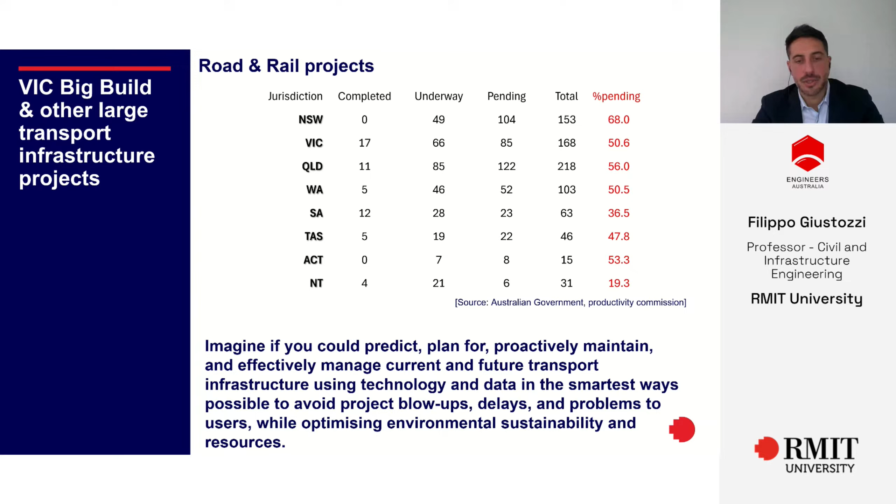So there is an opportunity to introduce technology that will allow us to do things better, to predict, to plan for, to use a proactive approach when doing maintenance on transport infrastructure. Let's not forget transport infrastructure projects might take a year or two or three to be built, depending on the size, but then they last for decades.

That's actually the important part. That's where most of the environmental impacts are generated from. Not many people know that probably just 10% of the environmental impact is generated during the construction phase, but in a transport infrastructure project, 80 to 90% of the total environmental impact is generated during the usage and maintenance phase, over the decades the infrastructure is supposed to last.

So if we can do things better for all those pending projects by using technologies, this will avoid project blow-ups. We've seen many different cases here in Victoria, for instance, delays and problems for users. So to do that, digital twin is one of the strategies.

Digital twin is nothing other than a virtual or digital representation of the physical assets. We can use this digital representation to facilitate the process of designing, planning, building, and maintaining, but also the end of life process of disposing of or recycling the infrastructure for a second life. So we can manage the entire life cycle of the transport infrastructure project using digital tools like digital twins.

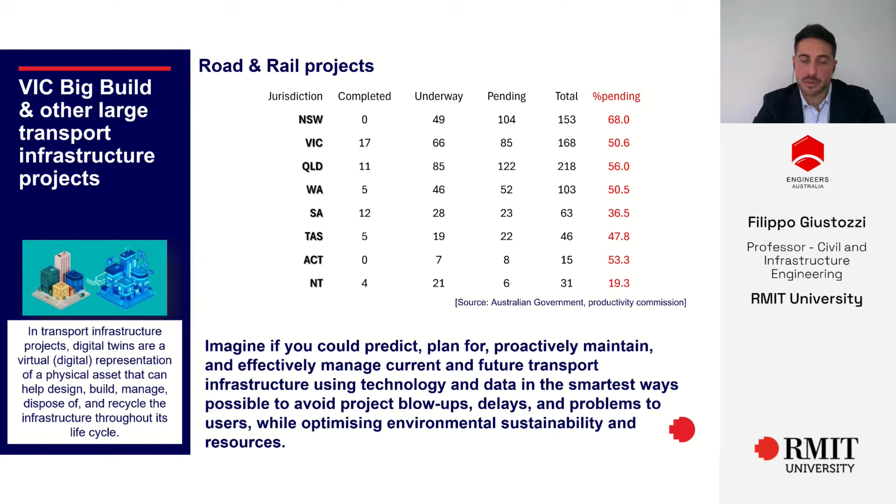Now, I said a few seconds ago that you can use digital twins throughout the entire life cycle of transport infrastructure projects. So if we look at a few examples, we definitely need to start from the planning phase. This is when we collect information about cost, the time it will take to build the infrastructure, the implementation, how difficult and feasible it's going to be, all the contract negotiations, and so on and so forth.

Digital twins can be used in this case to evaluate whether the project is technically and economically viable. And if it is, what the cost will be, the timing for implementing it, and how many stakeholders are involved. All of that relates to the planning phase.

I wanted to mention the example of the London South Dock Bridge, one of the few examples around the world where digital twins were actually used during the planning phase. They had a lot of significant challenges, and by the way, the bridge was supposed to be finalized this year, but there will probably be some delays as well, due to a lack of funding, that's my understanding at least.

So they had a lot of different technical challenges. One was designing the north abutment, because there was a need to house drive mechanisms. There was a hidden counterweight for opening up the bridge to let boats pass through it.

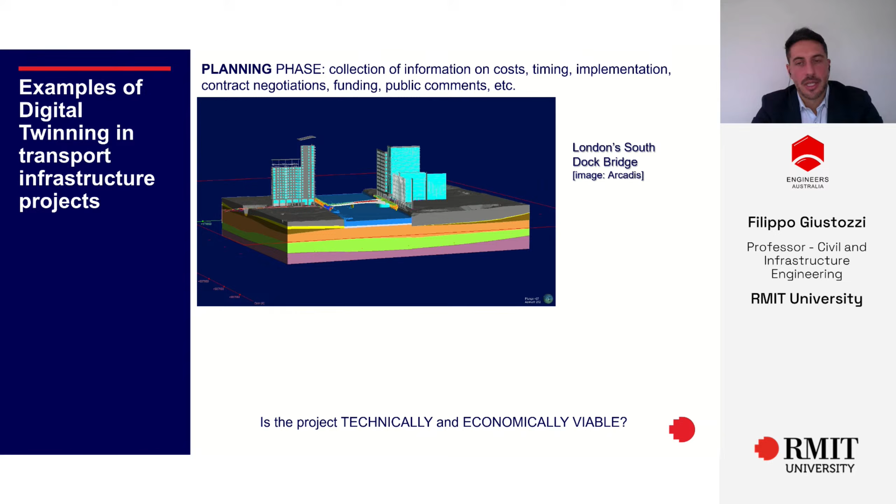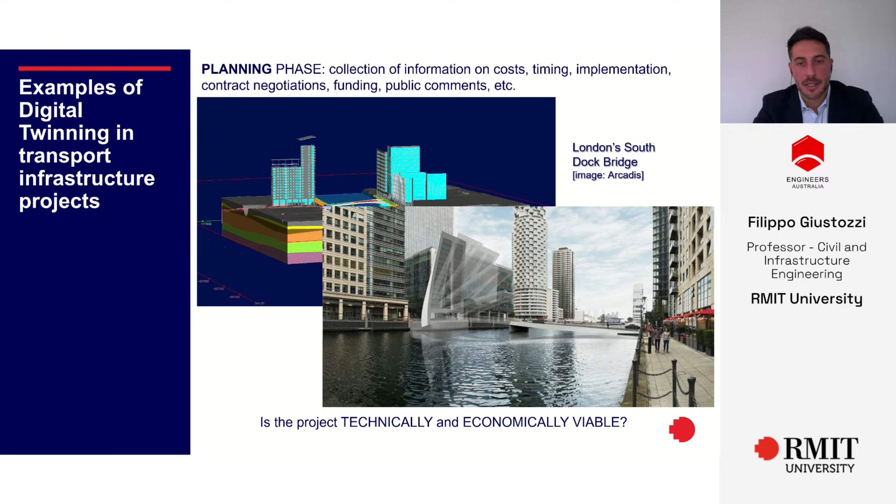In this case, Arcadis was the designer, and they were able to estimate the dredging volumes, for instance. They created geological cross-sections using digital twins. Overall, this integrated digital approach allowed them to save on ground investigation, estimated at about 30% of all ground investigation required, approximately £70,000 for this particular project. So doing it at the planning phase is a good way to start your project idea and verify how feasible it is from a technical and economic perspective.

Then we move on to the second phase, the design phase, continuing through the life cycle of the transport infrastructure project. At the design phase, we convert everything that was an idea into more technical specification details for the contractor to build the infrastructure, and later for the operator, if it's a road, a road operator, to maintain it.

This particular case should be familiar to a lot of people: the Port Rail Transformation Project that happened in Melbourne. The image is from Seymour Whyte, who was the contractor there.

The designer in this case was WSP.

This project, as the name says, was to transform or shift the majority of the goods and freights coming through those barges onto rail tracks rather than moving them on wheels. The big goal was to increase rail terminal capacity and improve the port's connection with the Victorian rail system.

This was done to reduce all the congestion related to trucks and moving goods on wheels in that particular area. WSP was given the task to design all of this. There were, as you can imagine, several stakeholders involved, and I think they were given around 6 months to design the whole project.

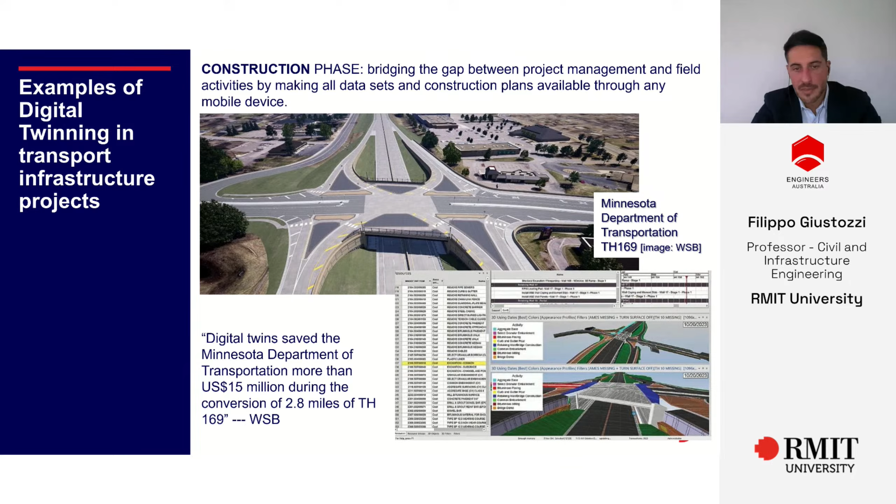Now, the fourth phase is use and maintenance. So if we keep going through the life cycle, now we've built the infrastructure, we need to operate it, we need to use it, we need to maintain it.

This includes all the monitoring activities, but also the maintenance for repairing the infrastructure. And that's also something a lot of people commonly forget. The infrastructure, if it's a transport infrastructure like a road or a railway, is going to be used by a lot of people every single day. So if we create a disruption in one particular point of the network, that is going to affect a lot of people.

So the usage phase, the fact that the users are using the infrastructure, that's also something that we need to manage and deal with effectively. Unfortunately, this use and maintenance phase is not really taken into consideration too much in terms of using digital twins for developing a model that will last and be effective during the usage and maintenance phase.

That's because most of the time we think a lot about the planning, we think a lot about how to design the infrastructure, and then we do the best that we can to build it. But then at some point, because transport infrastructure lasts 20, 30, 40, 50 years, it's going to be somebody else looking after this infrastructure for that long stretch of time.

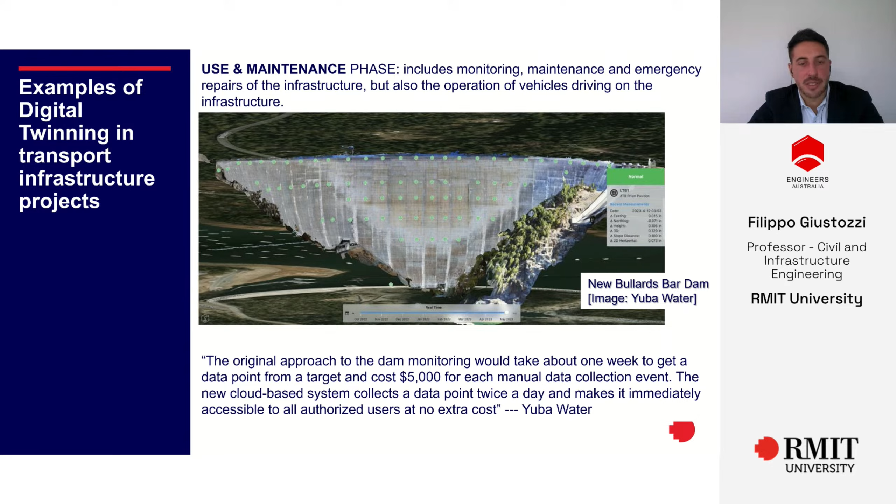There is a feeling that sensors are becoming smarter, cheaper, and smaller, and a few people are looking at putting small sensors into our daily drivers.

So at the factory stage, during the manufacturing of a car, there is a thought about using a small accelerometer, putting it into the car, and using some vehicle-to-infrastructure type of transmission system. For instance, the car passing through a portal in the middle of the highway, and the portal actually grabs all the information from that car in terms of vertical acceleration for the past kilometer.

This actually means that if you are the road operator of that particular road, you can collect the information from all the different cars passing through your portal, and this information will be helpful for you to identify if there are particular sections between portals

that require maintenance, because if you start finding a lot of vertical accelerations or higher than usual values of vertical acceleration, that means the roughness of the road is not as smooth as it's supposed to be, and there might be an issue in terms of potholes, for instance, or cars going up and down because there was a pothole there. You might need to prioritize maintenance in one particular section compared to another.

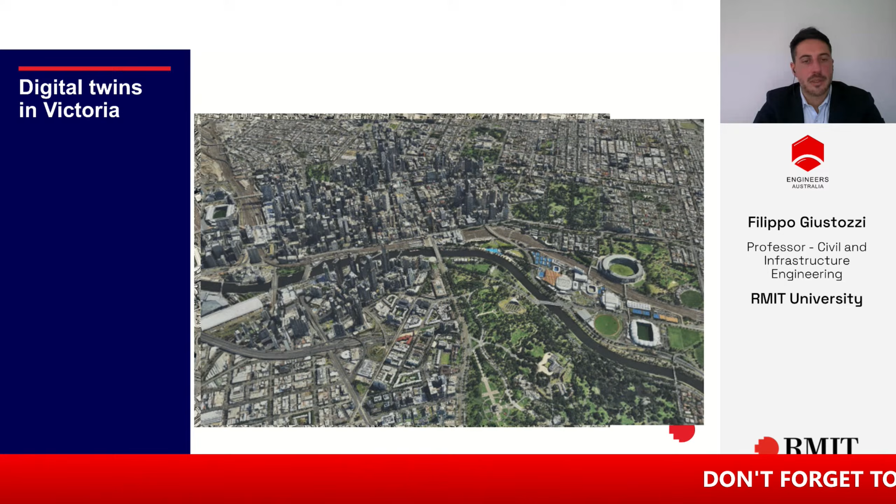The digital model can then be used to make predictions, for instance. So you can start overlapping a lot of different layers of information. In this particular case, for instance, we're looking at the precipitation change over the period between 2020 and 2039.

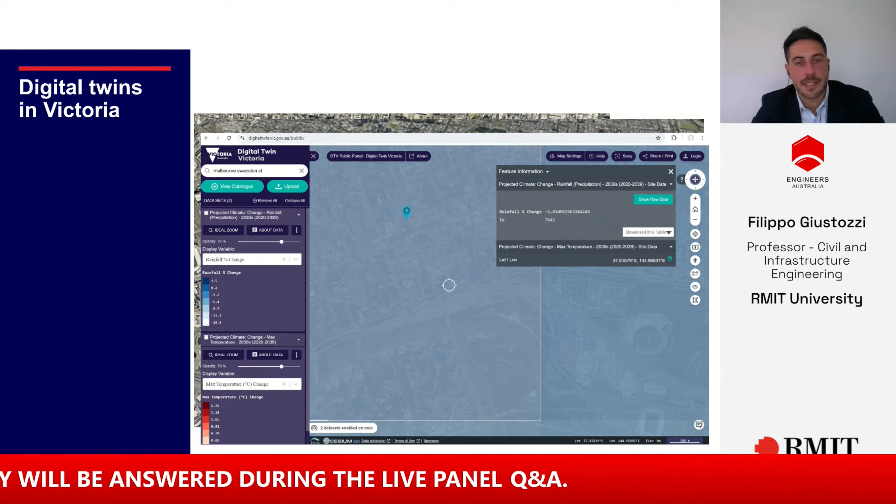2020 to 2039. And you can see that there are different colors because the prediction is that in this particular area of the CBD, there is going to be a decrease in percentage of rainfall change by less than 5%. In this area towards Richmond, the prediction is different.

So you can adjust based on the information here, starting by saying, okay, if I need to build new infrastructure here, new roads, I might need to consider flooding, flash flooding, rain intensity, and how that changes over the next few decades. You can do the same for temperature, for instance.

So there is another layer of information through the portal. You can see the web address there: digitaltwins.gov.au, digitaltwin.vic.gov.au.

And same for the temperature. Some areas of the CBD will be exposed to an increase in temperature of approximately 1 degree Celsius in that period of time. You can change the prediction time. They have all the way up to 2050, 2060 and onwards.

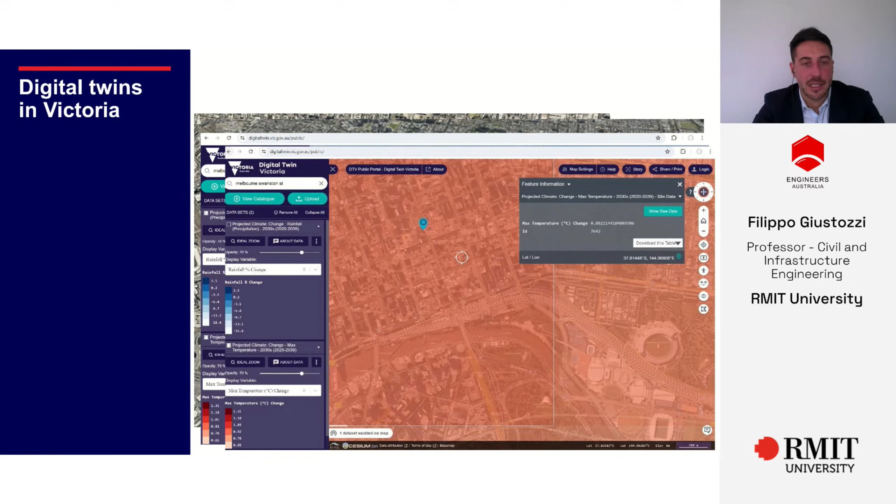That will also be helpful because, as you know, asphalt is black. Roads are made of asphalt, and the road will heat up if the temperature goes up. If the air temperature is about 40 during a hot summer day, the road temperature might be around 65 to 70 plus. That means all the buildings surrounding that road will be heated up indirectly by the road itself. So that might be something to consider when building new roads.

There are so many things that you can do. Unfortunately for roads, you can grab information from Digital Twins Victoria, but as you can see on the right-hand side, when you start looking for information, most of the data sets are empty. That's because we do not really collect much information for our roads. I can't find anything here that tells me what the defects on the roads are, what's the condition of the road at this stage, if it requires maintenance, what the sensors are telling me. Maybe there are no sensors in that particular road.

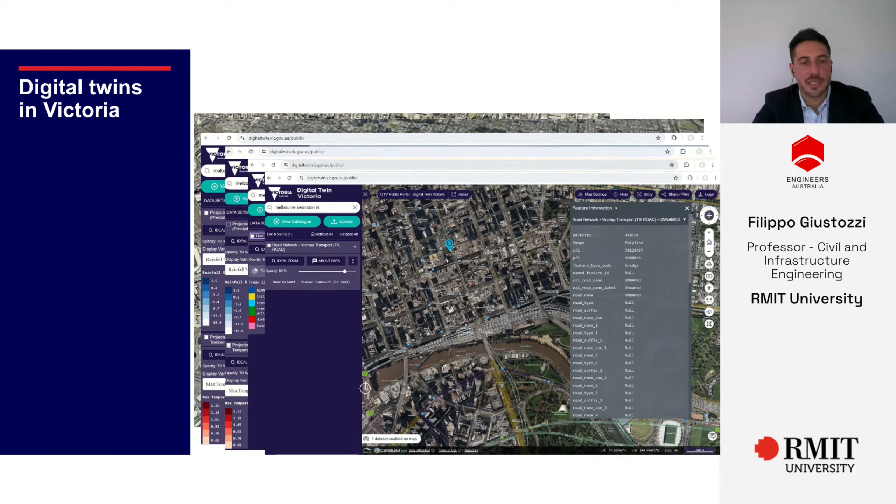So Digital Twins is like a huge digital brain that can help you manage all of these different layers of information.

I think, and I'm about to close with this slide and the next, that there is scope to use Digital Twins to produce what I call an autonomous infrastructure management system. Basically, the entire transport network, the roads, the rails, the airports, self-managing themselves from an infrastructure point of view. I'm not talking about traffic flows, I'm talking about infrastructure, the road, the rail track.

Using different algorithms like artificial intelligence and machine learning, we can enhance the capability of digital twins. The road can actually start looking at information in real time coming from the sensors and start alerting the crew: look, you need to go there at that particular time of the day, because that will minimize the chances of you creating a congested road between these two points.

Or if something happens to this road, I can let you know that if you close this road, this is going to affect this many people. If you're closing it at this particular time of year, this is going to affect this many people, so they will need to be rerouted through other roads, and this will create further congestion in those other areas. So all of this can be done automatically.

The big advantage is that the digital brain has much, much stronger computational power compared to our single human brain. We might still need to verify the information there, we might still need to train the algorithms. But I think in the next 15, 20 years, with sensors becoming cheaper, smaller, and better, and data safety being improved through blockchain technology and similar technologies, this can be achieved.

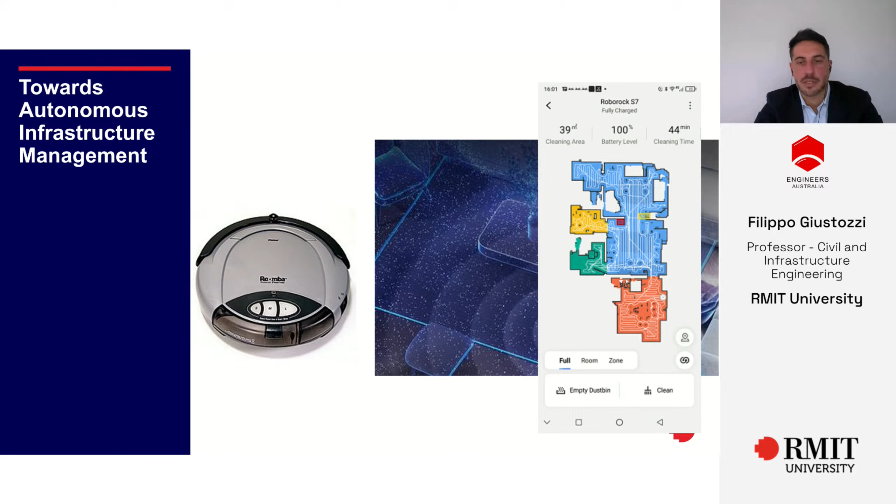So that's what I envision for our transport infrastructure network towards an autonomous transport infrastructure management system. And with that, I will now pass it on to our next two industry speakers for their case studies, and I will thank you for listening.

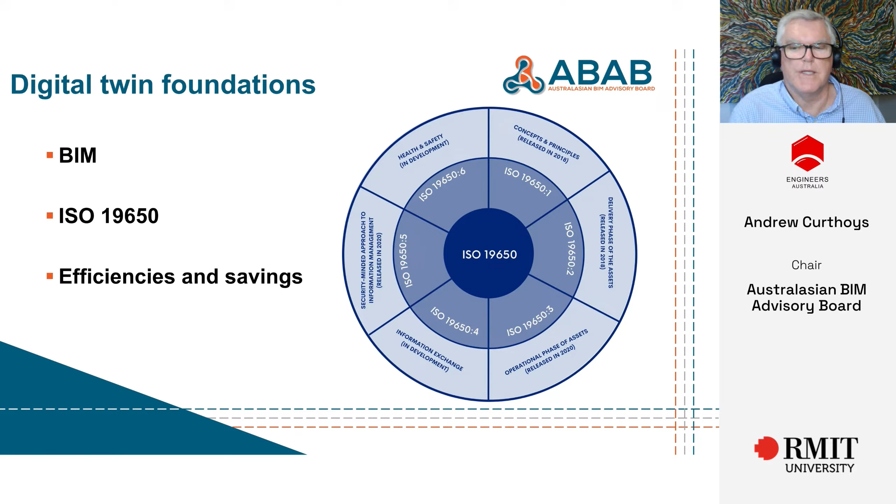Now, we need this information to ensure that the infrastructure being delivered and operated can be done so as effectively and efficiently as possible for future generations. If we get it right, future generations will thank us for the work we do now to improve the ongoing operational effectiveness of new assets. This approach will clearly help deliver savings and efficiencies.

The key difference between a BIM model and a digital twin is its connection to the physical twin. This is something I want all of you to take away today. Whereas BIM models typically need to be updated manually, what sets a digital twin apart is the model being updated by data gathered directly from its physical twin. This can be enabled by sensors, communications, Internet of Things, radio links, and similar technologies. The concept can be extended to bi-directional exchanges of information, where automated systems, including artificial intelligence, are used to control the operation of the asset. This connection makes digital twins attractive to infrastructure agencies and urban administration bodies because of their potential for effectively managing complex dynamic systems that have a significant impact on many people's lives.

Now, as we know, change is happening. The planet is warming, corals are bleaching, working from home is more commonplace, the population is aging, cities are demanding more energy. The impact of the pandemic and changes to regular seasonal infections such as the flu and the common cold are continuing. But there are opportunities occurring too. Energy transformations are underway, digital twins are being used in the creation and operation of transport infrastructure, and carbon accounting is needed as governments grapple with climate change and identify offsetting measures. So measuring outcomes, improving asset management, and improving the overall life cycle of assets is key.

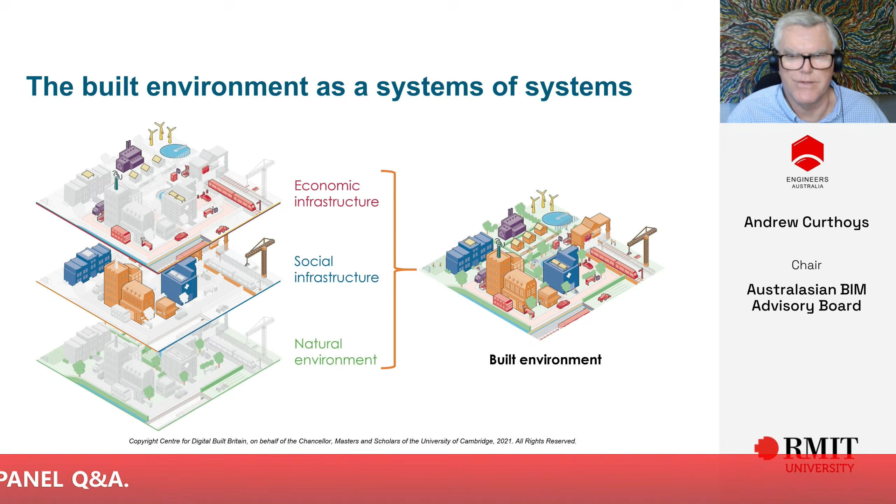So I want to draw on the work of the Centre for Digital Built Britain, and I acknowledge the incredible contribution it has made. It was established to drive and deliver better outcomes for how we measure, manage and utilise data to improve the delivery of major infrastructure and the integration of data assets across a range of different data sets, to create holistic approaches using digital twins to improve service delivery. Historically, we've talked about the economic, social, and natural environments, but not about the systems that enable these physical assets. So how do we utilise the data generated in each asset class to improve service delivery?

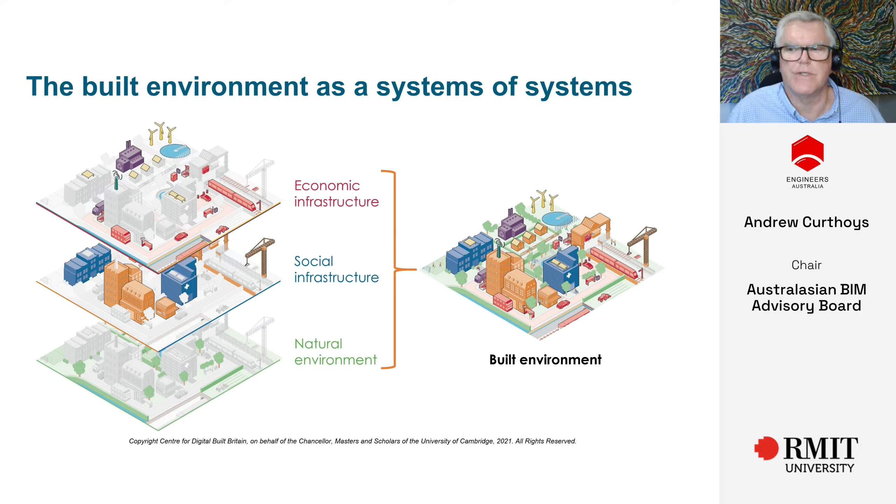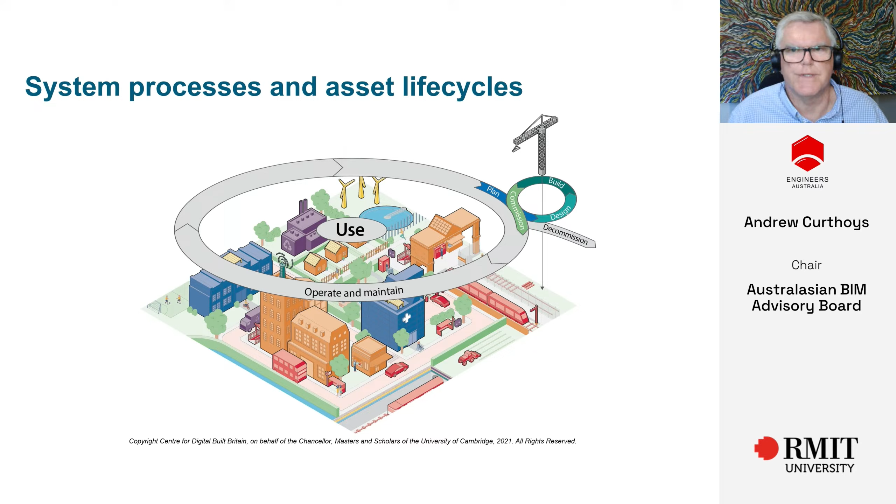We now need to operate and maintain those assets and capture the data more effectively to make better decisions. Simply, the digital twin can help squeeze that data lemon harder to get better outcomes from the physical assets, particularly for major transport infrastructure. There are a couple of examples I'll take you through shortly. But of course, it is the natural and built systems working together that will continue to deliver the services we need to help people move around cities, regions, and towns. And transport infrastructure which is digitally enabled is going to be key to that experience.

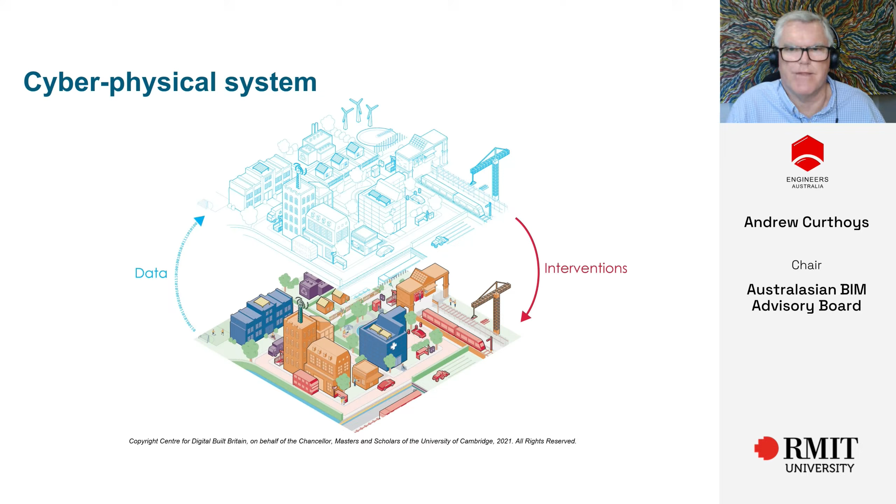But one of the things we really need to do is get it right. For digital twins, we need the right amount of data at the right time and in the right hands. It then needs to be used to improve asset delivery, be captured, and then move to asset operations.

We look at how we can improve asset maintenance using that data. You'll see through your experience in the workplace that some organisations have a very siloed effect with data, and they don't utilise it as effectively as they could. What I'm going to show you next is something I think is key to getting it right.

Data itself has a value. It is an asset class in and of itself. An example is UK Highways England, their National Highways program, and their cyber portfolio - their data, if you like. It's worth 50% of their physical asset, so a third of the total value of their asset classes.

It is really an investment class in its own right, and infrastructure agencies need to consider that and how they transfer that data, the correct data, with the asset to the operations owner. For example, major transport infrastructure such as Suburban Rail Loop in Melbourne, Cross River Rail in Brisbane, the Melbourne Metro, Parramatta Light Rail, Sydney Metro, are all delivering digital twins which will be used in the operations and maintenance phases of their life cycles.

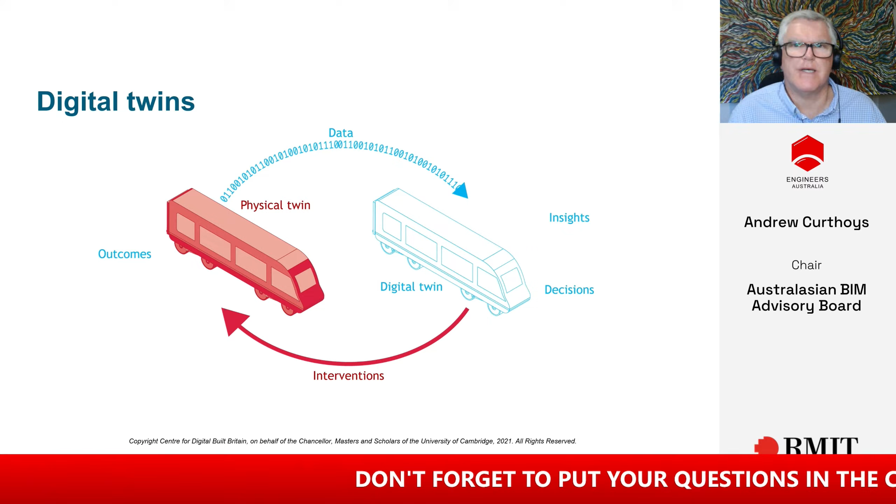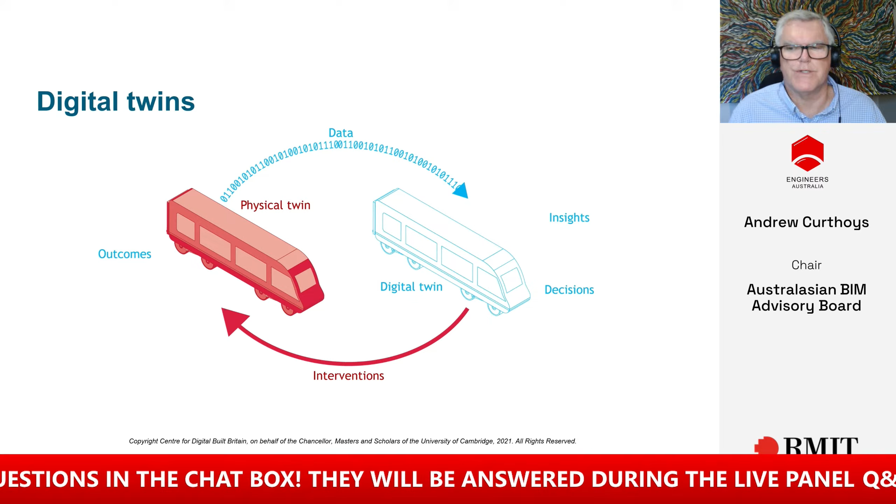But another major challenge in all of this is the integration with existing systems and legacy data. Businesses must ensure the digital twin system is compatible with their existing infrastructure, the data, the workforce, and can exchange that data seamlessly. This may require additional development of the work, such as building APIs or modifying existing software and hardware systems, and focusing closely on the transition of data governance models and workforce adoption.

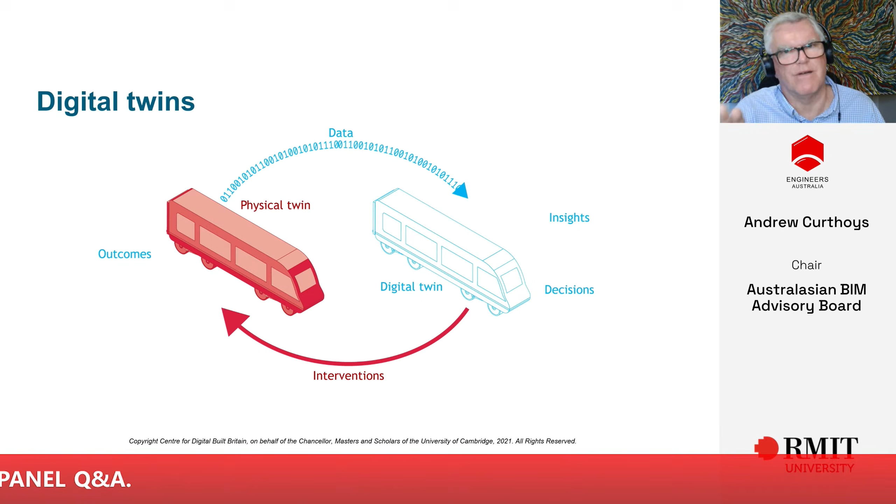But more than likely, it's going to be middle-aged men like me who say, don't worry about that, this is the way we do things here, and fail to embrace the way that data is being generated to improve asset outcomes and asset delivery. It's up to the young engineers and the graduates to challenge that approach.

In my view, it's really important that cultural change is embraced to ensure that the organisation can see the benefits of the digital twin to improve the operations of an asset and obviously improve the maintenance of that asset, and in turn improve service delivery for all of us.

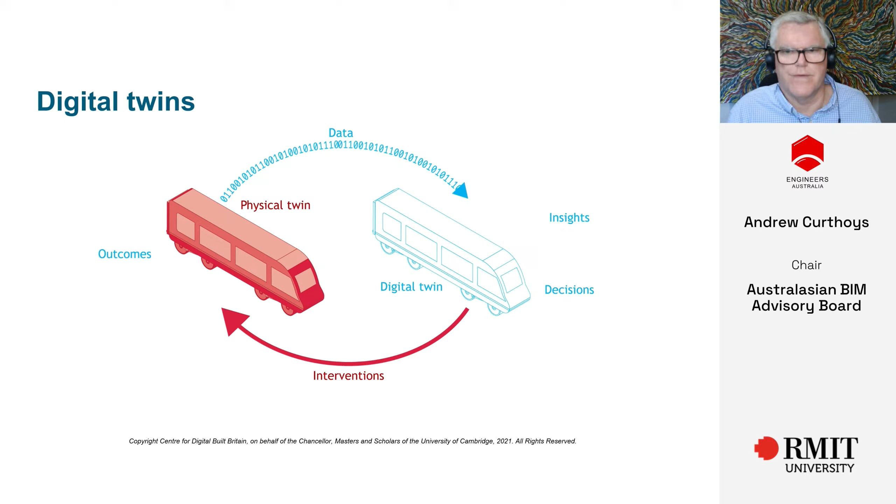So once you then look at the assets around individual elements, a train, a bus, a tram, you can then start integrating it with the network that it operates on. So, of course, when we start bringing new assets into existing legacy assets, that creates issues and challenges - it's how we integrate that.

As I mentioned though, I really think this is where machine learning and AI will come in to help the business, the operations managers, the asset maintainers. But those roles need to be open to hearing about the new approaches that are going to be available and embracing change.

So as you can see, even on a rail network, we've got the trains, we've got the running tracks, we've got the signalling - 3 different systems potentially that we're trying to integrate. But we can do better, and we must do better to improve it for society and also for all of us as taxpayers.

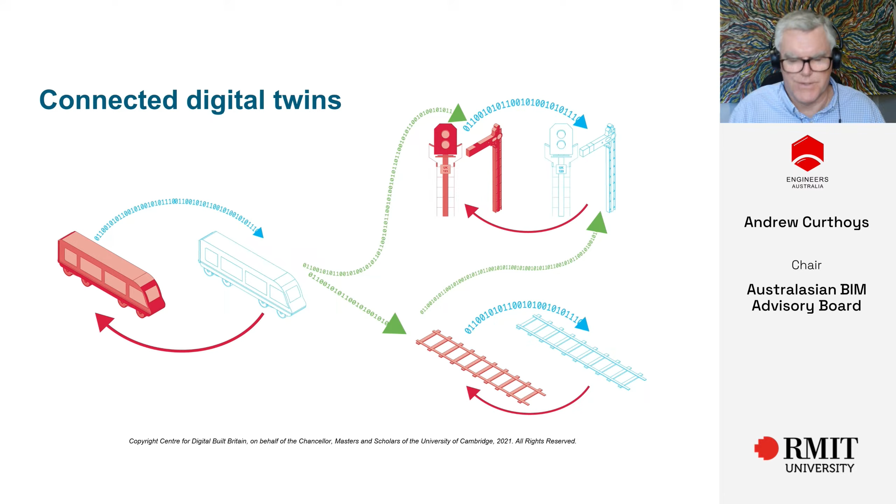So then when we start introducing an ecosystem of systems, we end up with the rail network integrating with the airline network, integrating with a bus network. And so we're really starting to bring a whole ecosystem of connected digital twins together. And this is when the challenges occur, because we've got different systems that start to rub up against each other. And we know in the physical world that happens anyway - there'll be a timetable breakdown, there'll be a delay, there'll be fog that'll stop planes landing, there might be a whole range of issues that operate. How do we overcome that?

We need to ensure that we are using the digital twin environment to make sure that we can get over those challenges, over those setbacks. And it will also improve the overall operation of the ecosystem of digital twins and digital assets, not to mention the physical assets. What we need to do is make sure that we are thinking about those and being one step ahead of what some of the challenges are going to be. Digital twins will help us do that, but human intervention is going to be needed to assist that.

AI and machine learning will be part of the contribution to a digital twin and asset improvements, but really, human ingenuity will deliver solutions and outcomes all the time. So it's how we free up our time to focus on that ingenuity, and digital twins, in my view, will also deliver that.

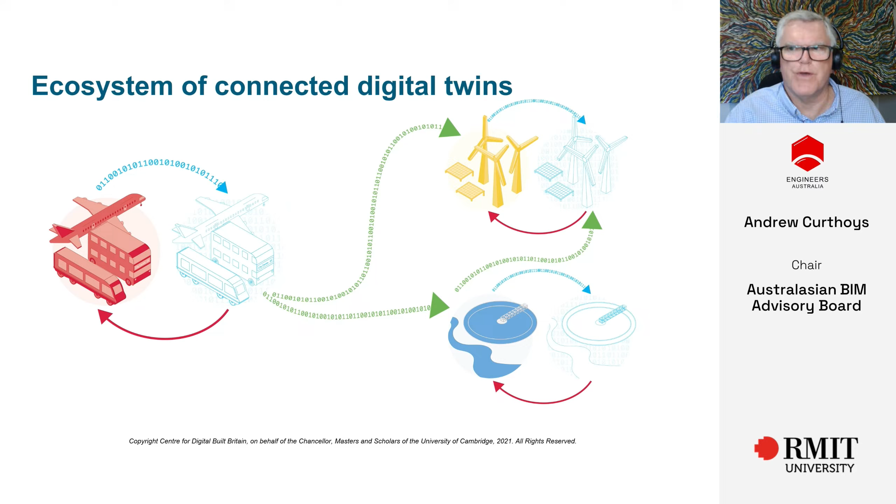So what are we looking for in society? We're looking for certainty, to provide confidence, to ensure that we can get good investment decisions for the future. Now, we've got those elements there that I've identified, but when you start bringing it into a city, you end up with a complex level of connected digital twins. You can see information on the ground. You can then start to see it above. You can see those physical connections or those data connections that are occurring all the time.

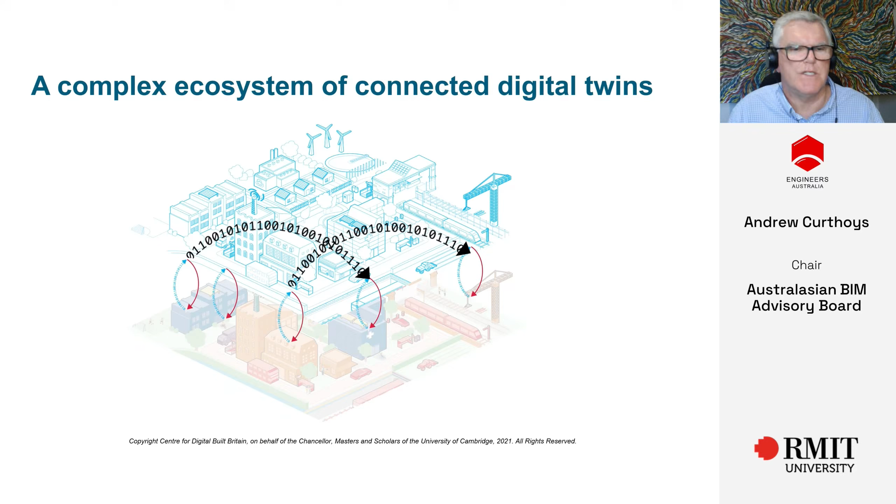It ultimately leads to a city or region-wide digital twin, which is sharing data and improving outcomes for the benefit of the operations of the assets, and improving service delivery of those for the users of those assets, which is us. In time, the assets will be able to share data and work effectively together with less human intervention. And as I've said, AI and machine learning will increase in the workplace, and they'll assist those asset operators and maintainers to improve functioning, to optimize operations, and thus, as I keep saying, squeezing those data lemons harder. So it's continuing all the time, and it's something that will be in the workplace, and it's already there, but it will become even greater over your careers.

So digital twins will be able to use continuously to improve outcomes. AI will be used to enhance data collection, improve predictive analytics, empower autonomous decision-making, and advances in modelling and simulation, and really promising transformative applications across a whole range of sectors. But why are we doing all this? We're doing it to improve service delivery for users and to help contain the operations costs.

Digital twins are here now. They're progressively improving transport infrastructure, but they will need human oversight to ensure the best outcomes for the operations and maintenance of the assets. So I encourage everyone to utilise the digital twins that you'll come across in your workplace. Engage, examine, improve, and refine.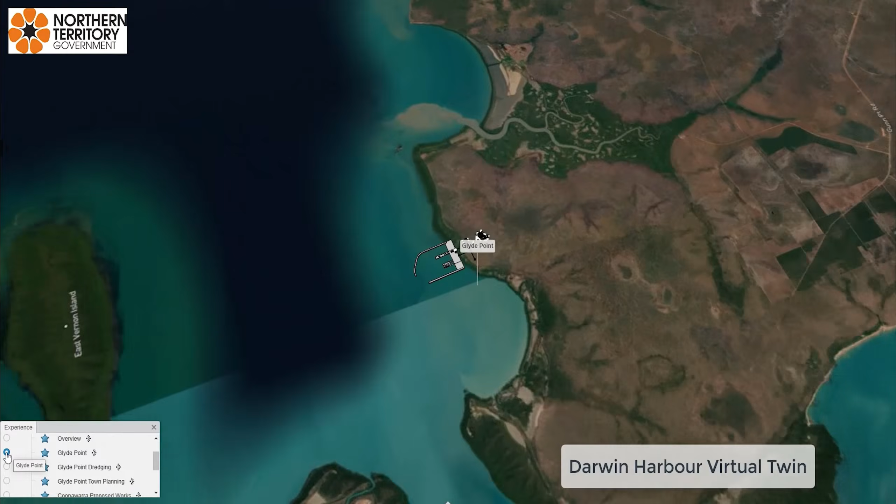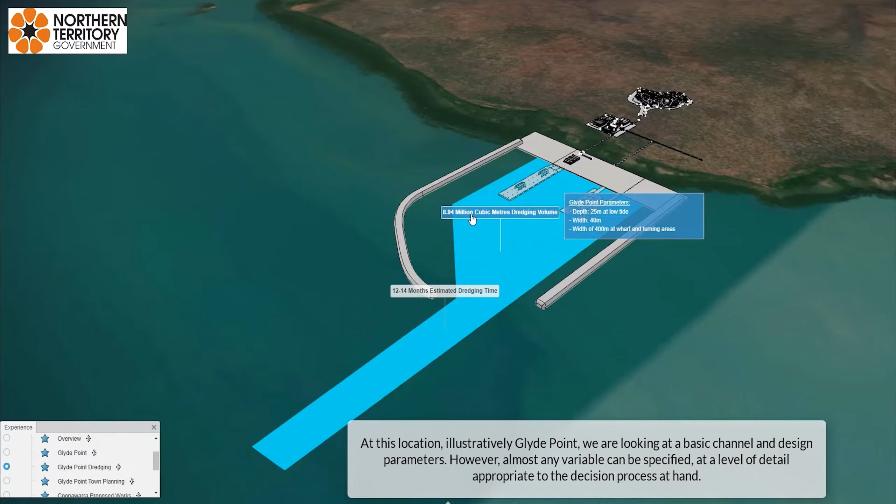Our first video is in relation to the Northern Territory, Darwin Harbour. This video shows us the preparations for expanding the Darwin Harbour. The port, even though it is in a smallish metropolitan city for Australia, has a lot of complex interactions in relation to maintenance, rail, cruise ships, defence, fishing, environmental considerations, roads, tankers, and it has a lot of control centre activities as well.

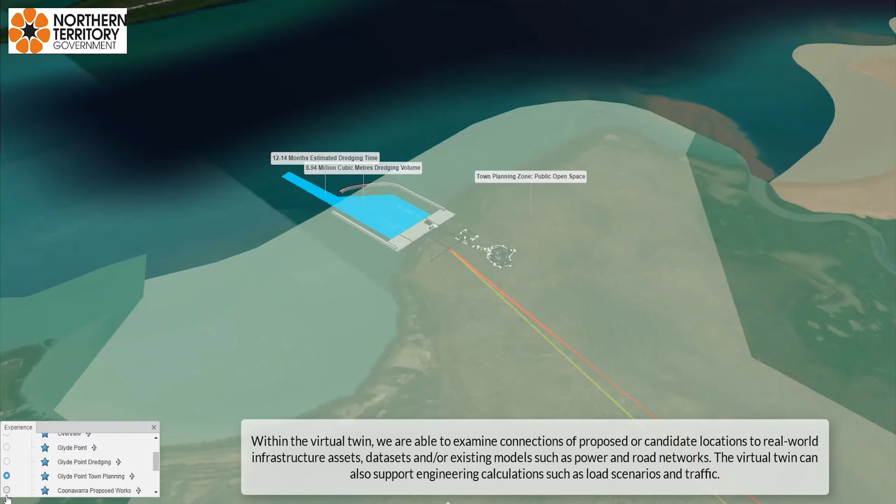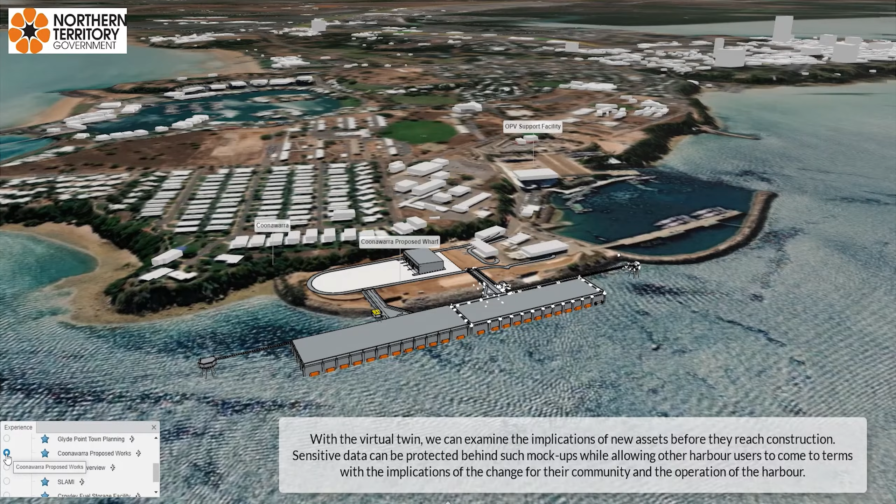All of these are occurring simultaneously most of the day and night on any given day in the Northern Territory. The purpose of the virtual twin is to enable all of those different stakeholders to see visually the planning aspects. It shows the constituents what's planned in terms of the actual expansions. It helps us design, configure, and in context see what some of the changes and impacts might actually be.

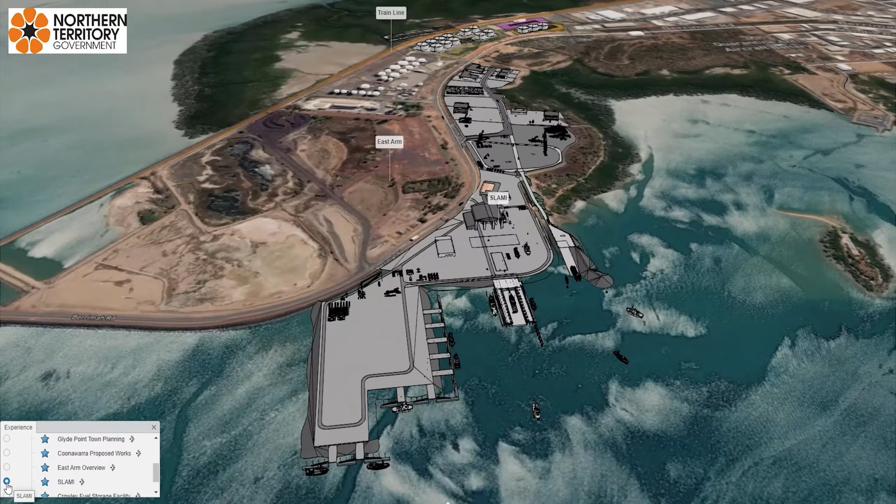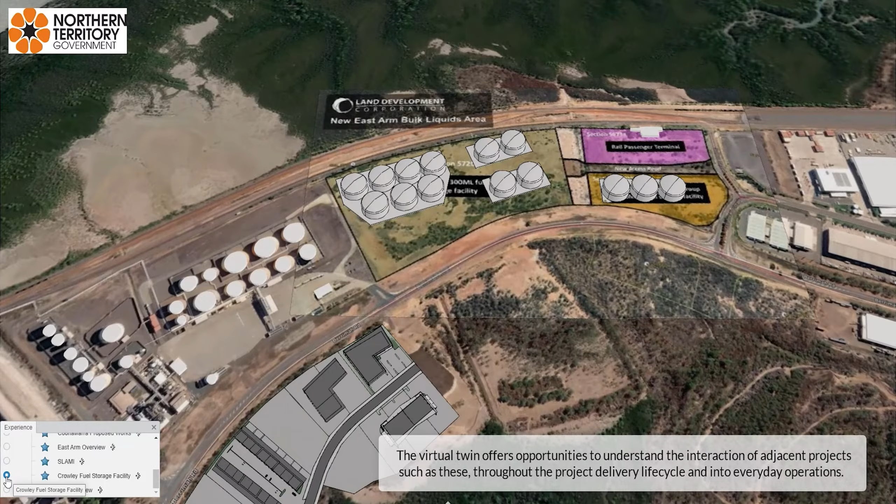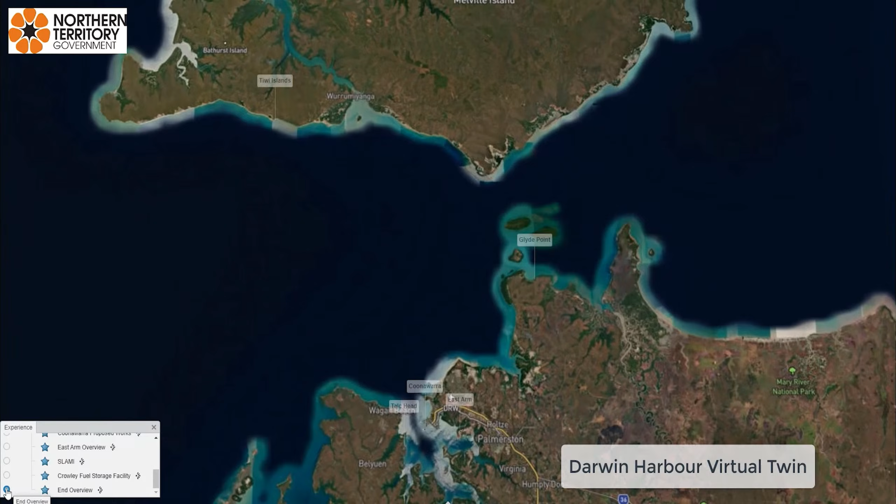This is actually a virtual twin as opposed to a digital twin. This is because the data is not in real time. To enable the building of such a virtual twin, it can take around 6 weeks for this particular project that we have here on the screen. There are a few variables that I'll point out a little later in relation to these.

In terms of actually completing the virtual twin, there are over 15 different software applications that are used. There are server considerations, whether it's sitting on a cloud or hosted within your organization. There are 3 external sources with many data points that we need to get data from. There are over 60 objects, some of which we need to license. And there are hundreds of data points and 15 skill sets just in terms of the technology and staffing requirements, plus other skill sets we need to add as well.

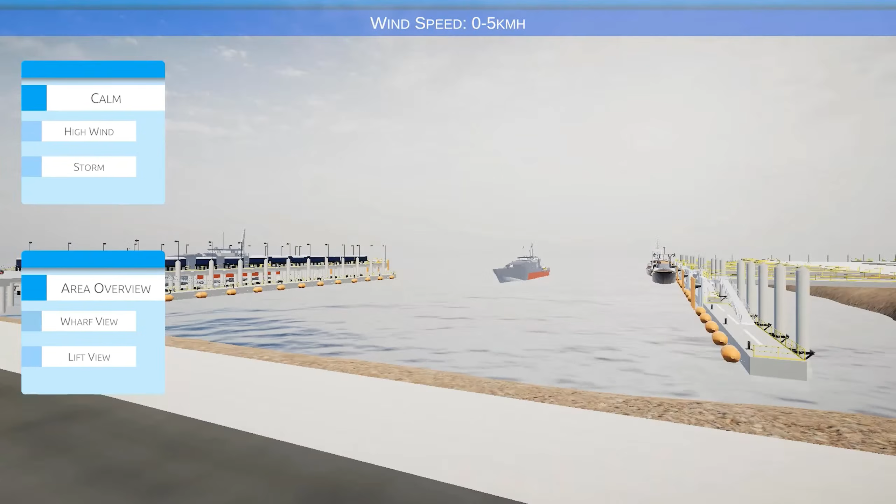Now we'll turn to our second digital twin. This is actually a digital twin. It's based upon and built upon the virtual twin components. So with our first lot of 6-week activities for each example or use case, such as this one here, we can then start to add some real-time data into it.

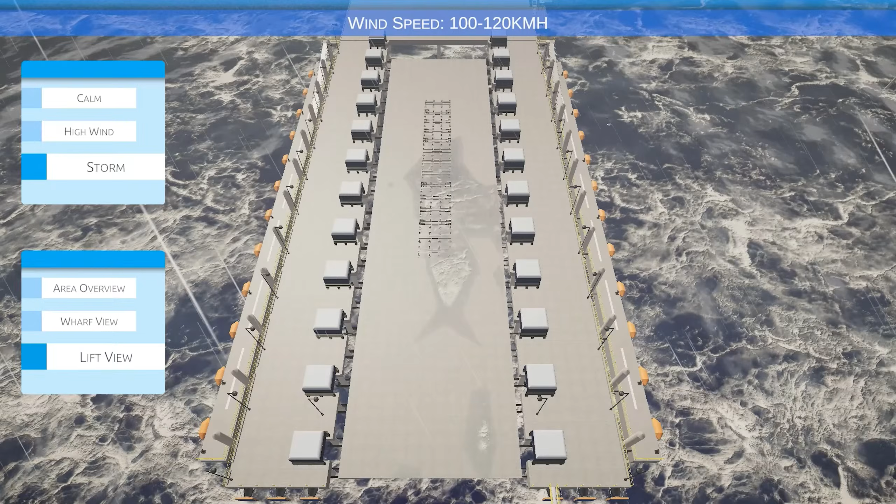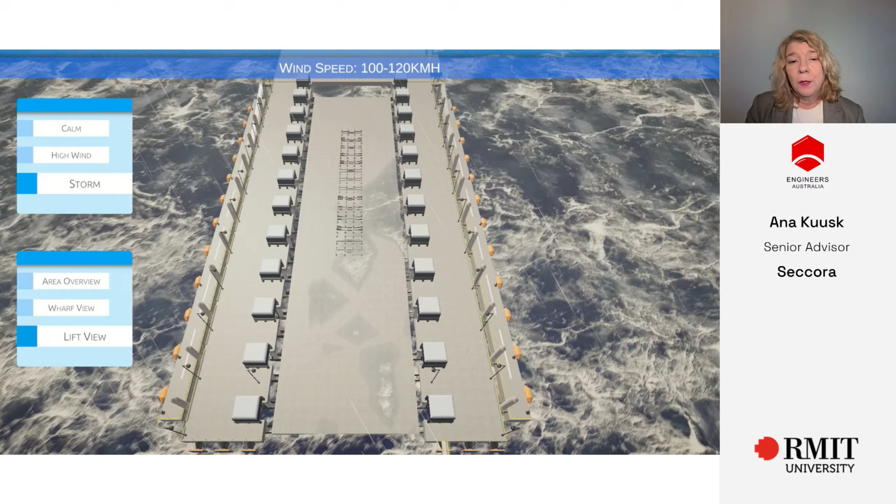This example shows some of the weather conditions, which can be quite extreme in Darwin - there can be 8-metre tides, extreme rain patterns occurring, and quite often cyclonic conditions during some parts of the year. This all helps us identify, particularly with different users of the port, whether that's defence, cruise ships, fishing activity, or port management activities, what the impact of external environmental factors will be for those users, and also for the engineering, design, construction, and situating of those assets in the broader port area.

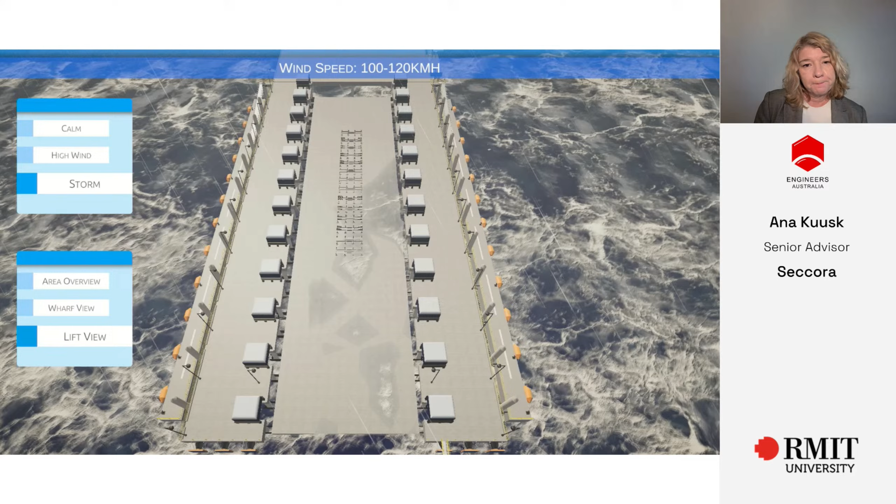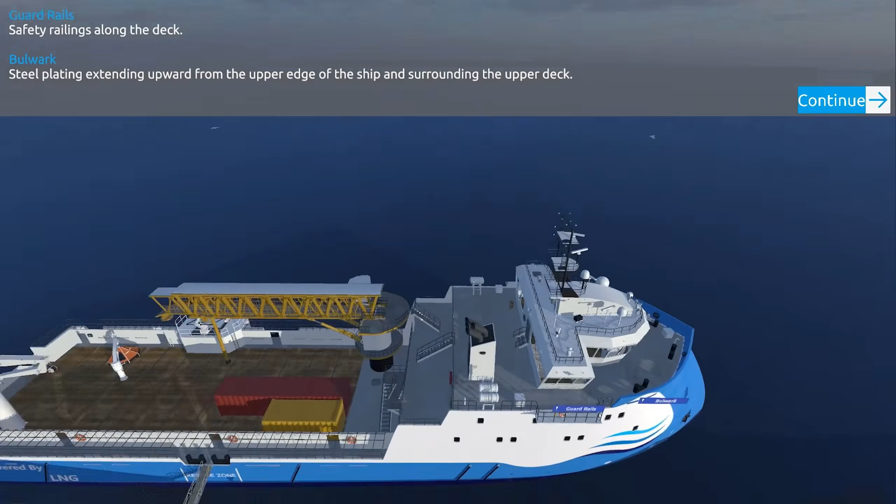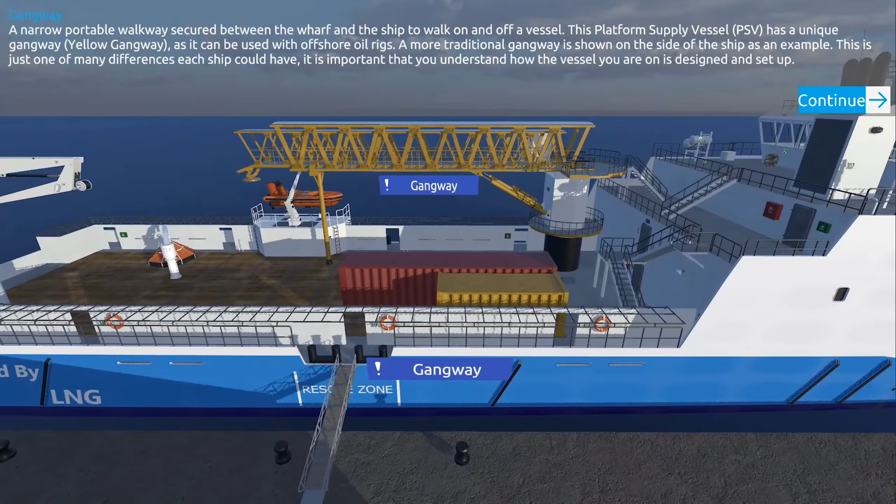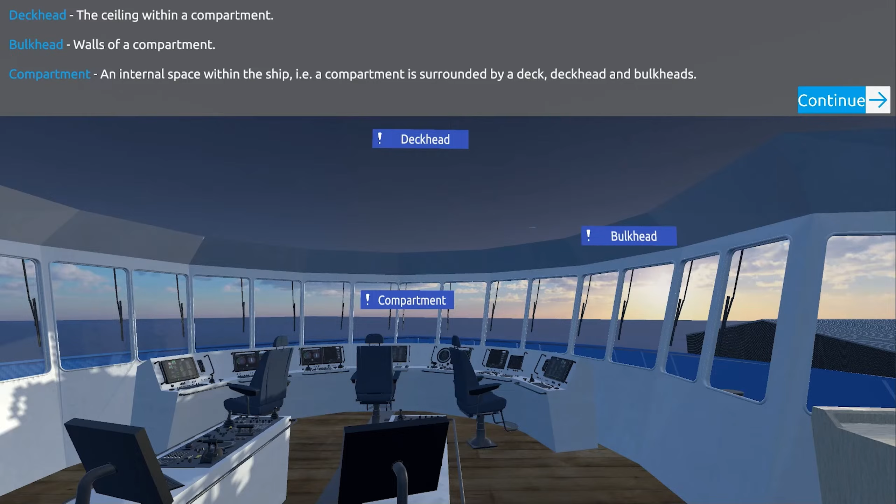Now we'll turn to our third virtual twin. This one is based upon some of the underlying features that we showed in the first video. It's really a training video as its main purpose, as you'll see as we walk through. Some of the objects and icons, like the buoys, the boat, and other components on the deck, are actually licensed objects, and there can be many, many of them that you need to account for if you're planning to design and deploy your own virtual twins.

This virtual twin, again, has no real-time data going to it - it's not updated very often. It's often used in conjunction with a VR headset as well, so that people can get familiarization, particularly with the safety aspects, before they actually go out to visit the asset for the first time.

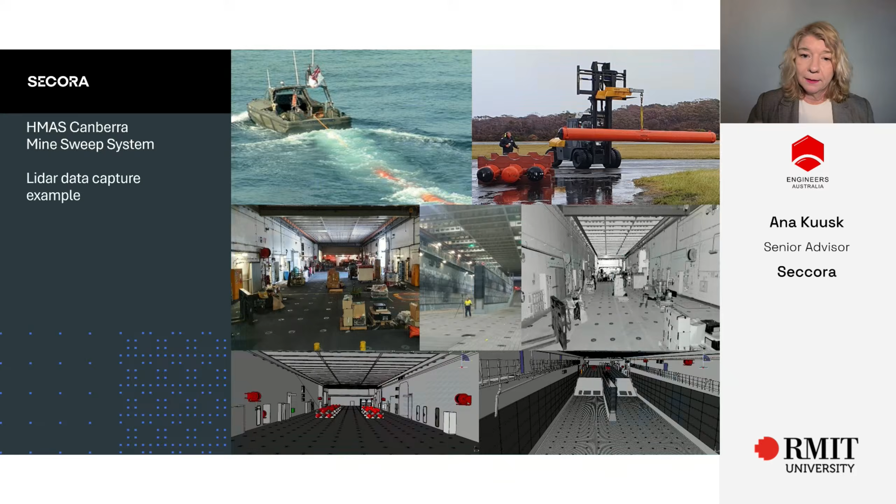Obviously you've got your own stakeholders, and you need to start with your requirements, requirements gathering, and some user stories. In an engineering context, using engineering software, we'll quite often put those requirements into the model-based systems engineering software, so that we've got traceability from a systems or software engineering perspective, to trace that what we delivered was meeting what the requirements were that were specified up front.

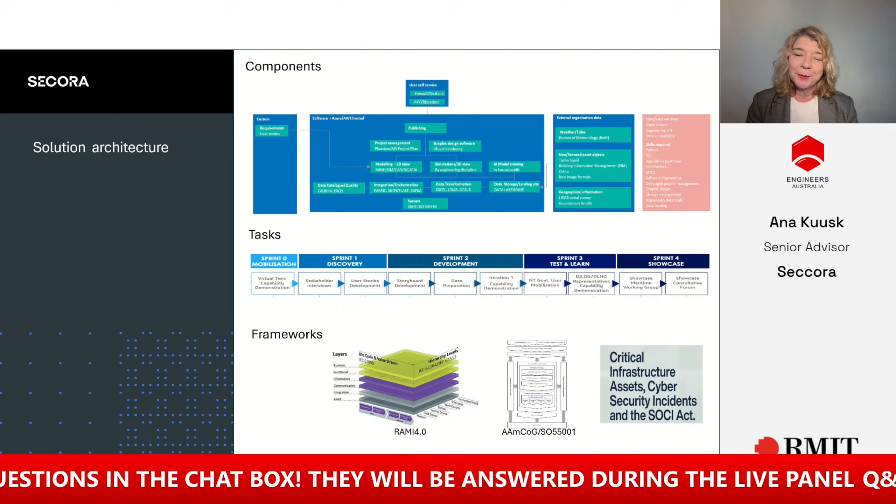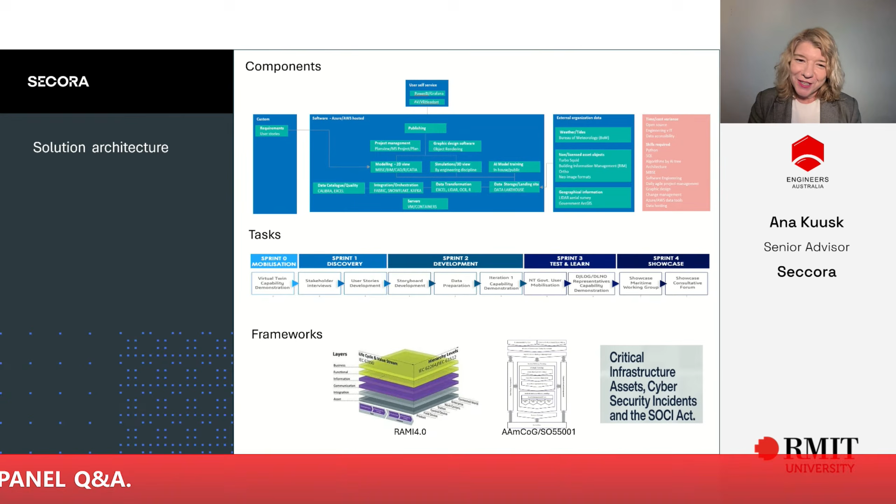That part of it in terms of finding the data and transforming it, performing the algorithmic methods on the data to be able to visualize it is what often takes a great deal of time in organisations. If you're starting out on your journey, I'd encourage you to put somebody in that role to go out and find those data sources you might like to visualize as a virtual or digital twin. Get a catalogue of the data required, the systems, how difficult it is to find those systems and that data, and start bringing it into your environment, getting skilled technologists to integrate that data together and use the tools your organisation has available. Most organisations will have these tools, particularly for data integration and quality.

They're quite often as part of your cloud environments. In terms of the actual visualizations and undertaking the calculations from an engineering disciplinary perspective, from a mechanical, electrical, civil, etc. lens, that's quite often specialised modelling type software you need to account for as well.

In terms of the cost and the timeframe, the first example, as I was saying, was about six weeks that we did with Northern Territory, and we built on that from a virtual twin to a digital twin. Some of the things that can affect the time, cost, and quality of your end output is definitely getting onto finding the data and converting and transforming that data first, and starting that early.

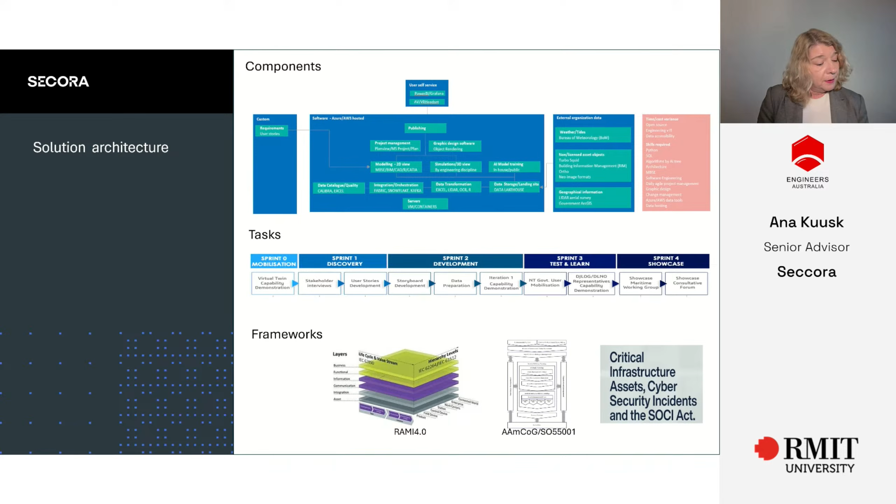So in wrapping up, hopefully this has given you a little bit of an understanding of what some of the aspects are that you need to plan for to be able to enable your digital twins in the quickest way and means that you actually can, so that everybody has a safer working environment, and that we're utilising the technology and the environment and the engineering enhancements that we've actually made over time.